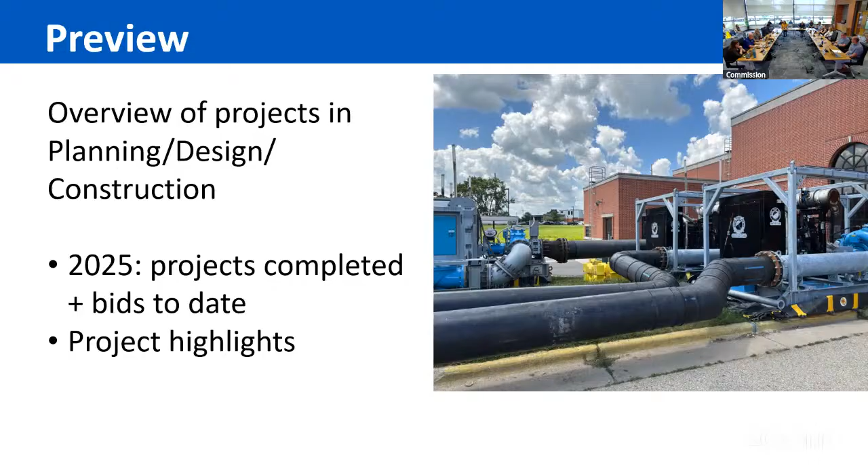Okay, so starting with projects in planning, we have the projects listed here with the stoplight colors. As we've discussed before, at the treatment plant, we have 2 large facility plans underway: heat and power, which is on track to be completed this fall, and then the biosolids facility plan. I'm showing that one as yellow. We're a little behind schedule on that as we just kicked it off in late spring.

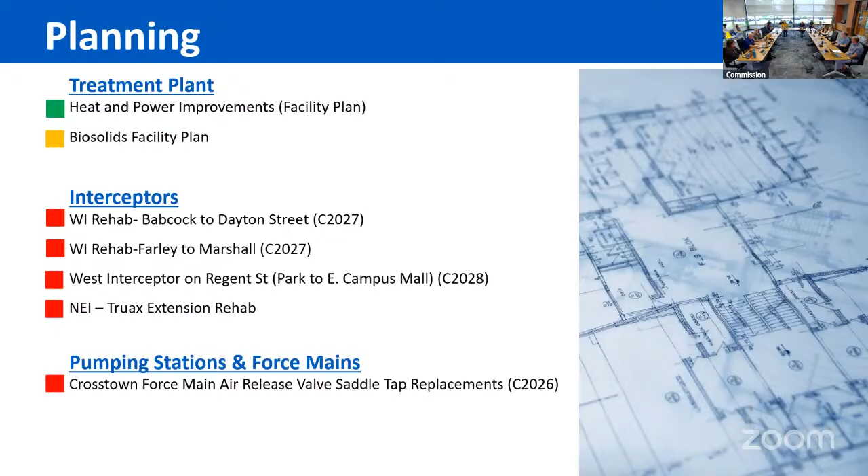And then onto the interceptor projects, 3 of those are lining projects that we hope to begin later this year. One of the interceptor projects, the West Interceptor on Regent, is essentially just waiting to be coordinated at some point with the City of Madison project whenever it occurs. And then lastly on the sheet, for pumping stations and force mains, we have the crosstown force main air release saddle tap replacement, which we anticipate starting in the fourth quarter of this year.

All right, next up is design. The stoplight colors are indicative of how it's going. At the treatment plant, we've got liquid processing phase 2, which is on track. We are currently reviewing 30% drawings for that.

I talked about the Lagoon Dike Improvement Project at my last update. We're on track to bid that early next year. For dryer and seeding, we're a little behind schedule, but you should see an item selecting a consultant for that at the first meeting in August, so watch for that. For W4, we are at 95%, so we should be bidding that probably this fall, September-ish.

For the interceptors, we're in design for 4 projects. I'm showing the 9 Springs Valley improvements as yellow. We're a little behind where we thought we would be with that project, but we do have the route selected, and we do have our field work complete, and we're working on starting the real estate acquisition process for that. Remember, that's the project that will replace the pipe where we had to do the emergency repair last year, AKA some of you called it Theron's sinkhole.

I did also want to update you on the final numbers for that emergency repair, as we've now received contractor invoicing for that. The grand total there came to $1,550,000.

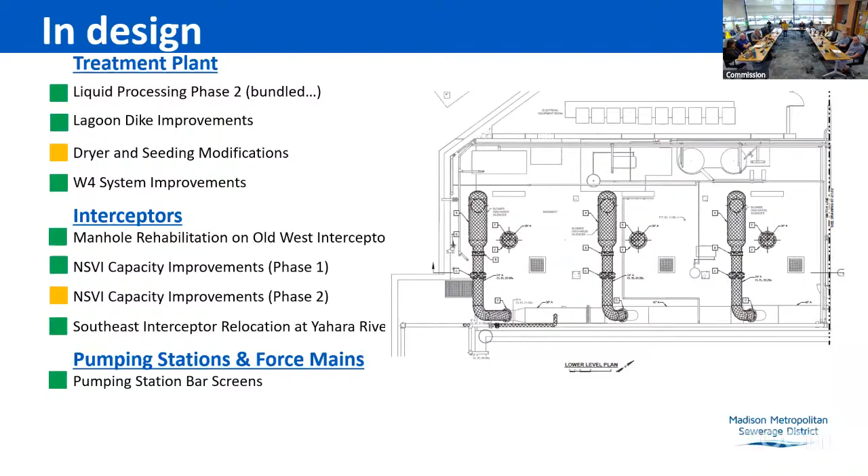Okay, into construction projects. Here's a map with our current major construction projects. I've got 10 on the map shown here. So 3 projects are in blue down at the plant. Then there are 5 interceptor projects in purple: 1 up in Waunakee and Westport, 2 along University Avenue, 1 along Highway 51 south of the Beltline, and then 1 in the city and town of Verona.

And then finally, we've got 2 pump station and force main projects. They're shown in teal. So pump station 17 down to the very far southwest, and then 1 newly into construction phase shown at pump station 10, which is up to the northeast off Milwaukee Street.

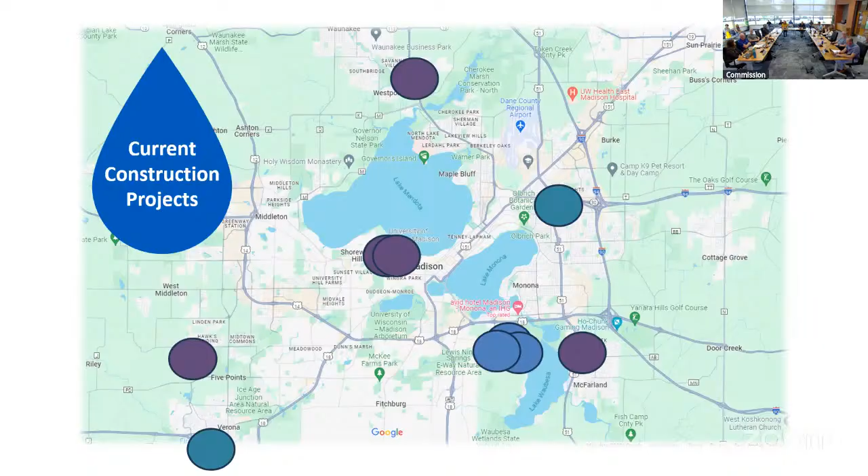So here's those same projects with the stoplight colors. Remember, italics means that I've newly moved it into the next phase, so that means it just moved from design into construction. You can see a new one there at the bottom.

At the treatment plant, starting at the top, we've got 3 projects underway. The sludge thickener drive replacement, it's kind of a tongue twister, is yellow. That's been bid, but we're waiting on equipment arrival in November. The electrical service equipment replacement is yellow, as we've had some contractor permitting delays, but they're finally rolling again. They were in fact pouring concrete this morning on that one to start bringing the building up. The flow splitter here at the plant is on track.

On to interceptors. There's a lot there, so I won't go into detail, but I want to mention a couple things. For the Lower Badger Mill Creek Phase 6, we had anticipated completing the portion of that project along Shady Oak Lane before Labor Day in order to not interfere with the Ironman bike route. However, the contractor wasn't able to get the manholes in time, so instead they've elected to wait to begin that pipe install until after the race so that we won't screw up Ironman. So we won't really get started on the pipe install for that until after Labor Day. That's kind of the bad news.

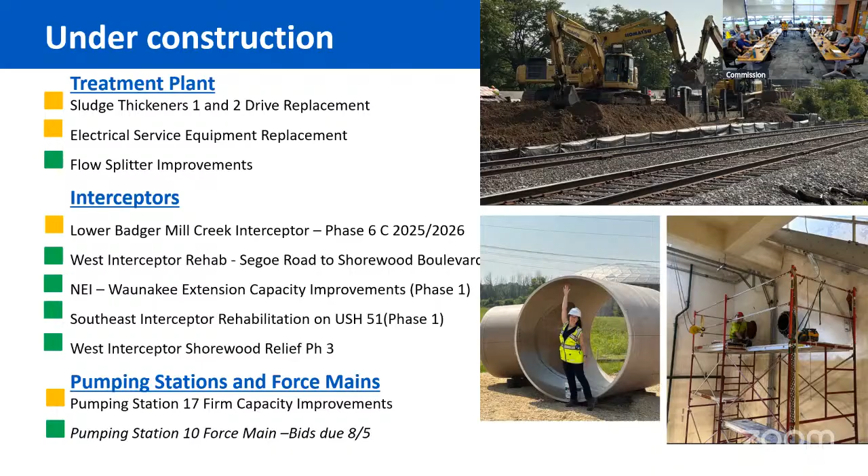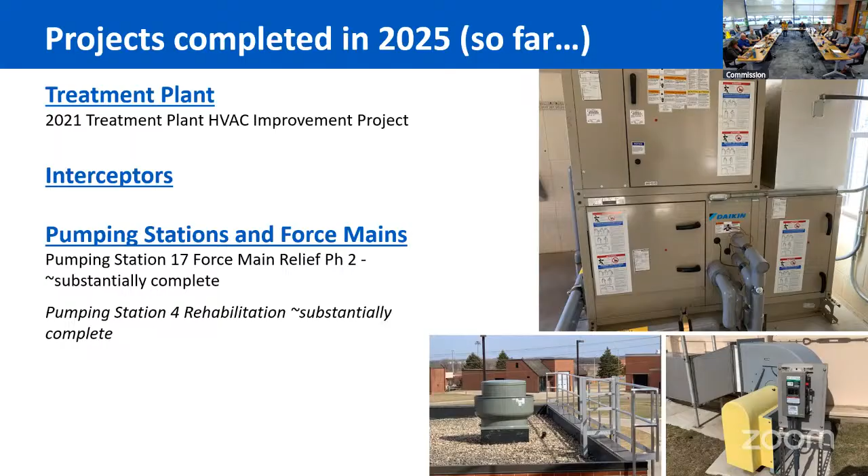Switching gears now to major projects completed to date in 2025. Remember, italics means it's newly added to the slide since my last update. So far this year, we've got 3 completed projects. We talked about the 2021 HVAC project in my last update, and the other 2 projects listed here under pumping stations and force mains are now substantially complete. I've got more information on those in a second in project highlights, so I'll talk more about that in a minute.

All right, lastly, on to a couple project highlights. I wanted to highlight 2 of the projects that are now substantially complete. You should see the acceptance of work items coming through commission for those in the next couple of months.

That's what brings flow into the pumping station. The second thing is the upgrades at Pumping Station 17 itself to handle those higher flows. And then the third is the Pumping Station 17 relief force main - essentially constructing a second parallel force main to carry flow away from the station.

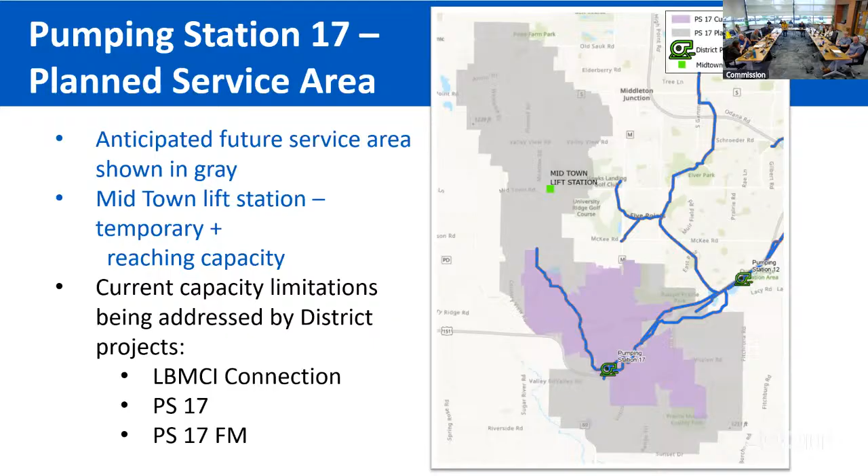So you might also recall that the Pumping Station 17 relief force main has been built in 2 phases. Phase 1 was completed in 2022, and now the second phase is substantially complete. The scope of the second phase was to pick up at the west end where phase 1 left off, west of Highway 151, and then continue up towards the northeast to Goose Lake, where the pipe ties into the Nine Springs Valley interceptor.

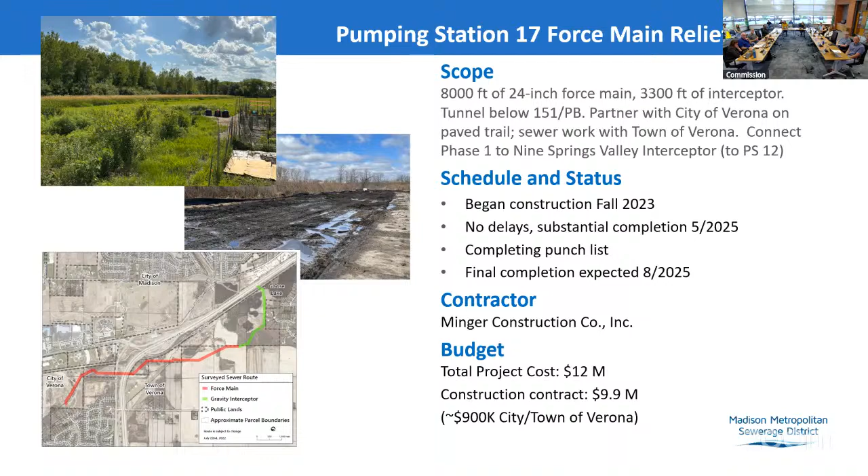That project was constructed by JF Ahern, and the completion of the project was delayed about a year, mostly due to supply chain issues. That seems to be sort of the new normal for our projects that are kind of heavy equipment, mechanical and electrical equipment heavy sort of projects, unfortunately.

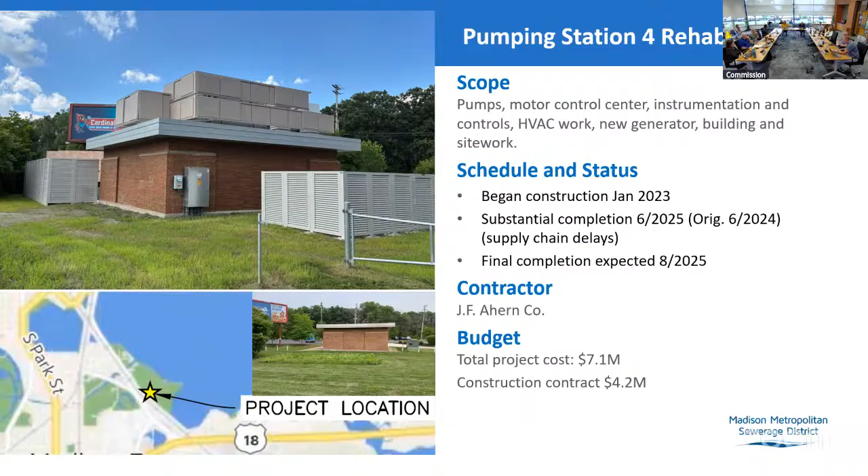So I believe with that, that's all I have for today. Happy to take questions. Thank you, Lisa. Anybody have any questions?

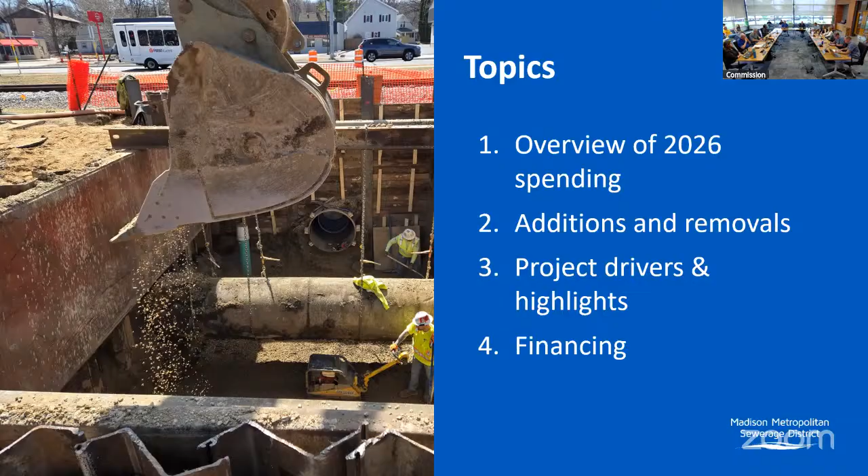So we have added some new projects to the plan. The most notable ones are listed here. The biggest one is a remodel of our laboratory, and in the item after this one, Mary Powers will be talking about lab operations and will go into more detail on the needs and what's included in that project. There are also 2 interceptor rehabilitation projects that are new to the plan, and then a smaller maintenance project for some equipment replacement at our pump station 2. In total, in aggregate, they are about $9.2 million.

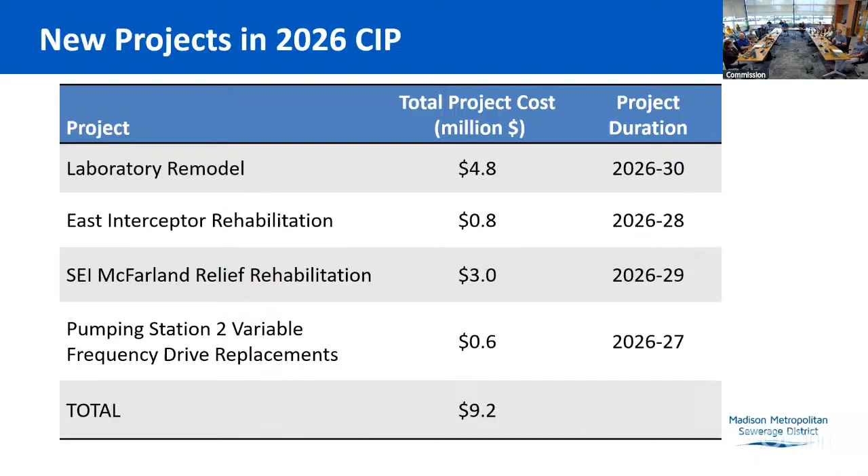So to offset those costs and also staff resources, we look for some removals as well. They're listed here. The first, the monitoring stations — you may recall that last month Jen Hurlbus provided an update on the I/I program and talked about this regional monitoring network that we had. This item was supposed to provide permanent monitoring stations. We're still going to do that work, we just think we can do it with temporary meters that are less costly and also more flexible. So that item will no longer be a capital item.

The next item, access to interceptors. Right now we can't access 20% of our system just due to wetlands — our facilities are in wetlands and other environmentally sensitive areas. So the intent of this item was to provide permanent access. Instead, we think we can provide access on a project-by-project basis through other means.

Then the last item there, power generators. This is an effort to provide standby portable generation at all 18 of our pump stations. Right now we only have it at 5, and we'd do that over a 10 to 15-year period. This is a really great project, we'd love to do it, but right now we have greater priorities, so we're putting this one on hold. I should point out, though, that we still meet all applicable code requirements for backup power.

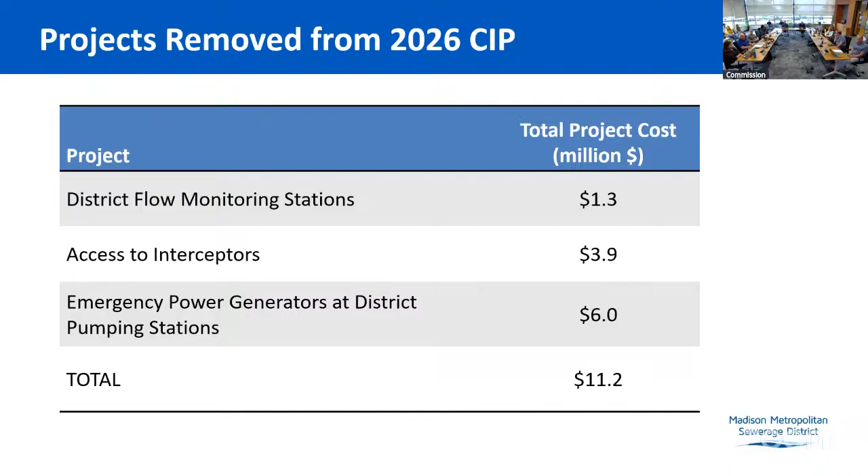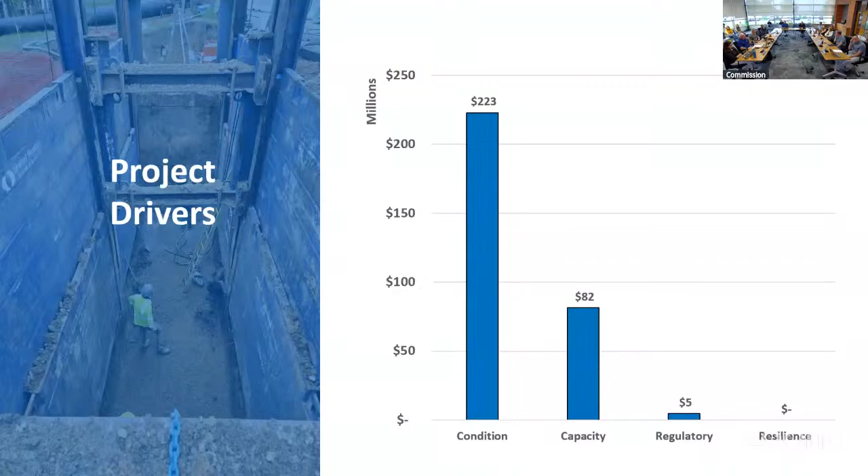So getting into some of the specific projects, I'll start with the interceptor category. In the past 20 years we've really focused on other interceptor systems, like the West Interceptor System and Lower Badger Mill. They've had multiple phases over the last 20 years, but those projects are coming to a close now, and the focus will shift to the Nine Springs Valley Interceptor.

You've heard a little bit about this project already. Phase 1 and Phase 2 are underway. It's a long project, about 30,000 feet from Pump Station 11 to Pump Station 12, so we are well underway on those two phases. Phases 3 and 4, capacity is supposed to be reached sometime between 2030 and 2040 in those stretches. We'll attempt to do some more flow monitoring and zero in on the time periods when those are needed, but it likely won't be for another 5 to 10 years before we start on those.

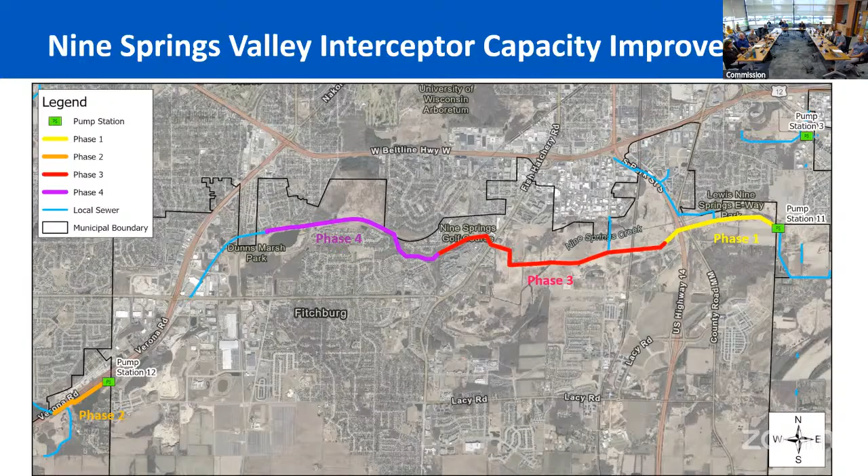Moving on to the condition of the interceptor system, I always like to show this slide as a reminder of the age of our system, showing pipe installed by decade. You can see that about 70% of our system was installed prior to 1980. Given that some of these sewers have service lives of about 50 to 75 years, if you do the math, we really need to start rehabilitating these sewers.

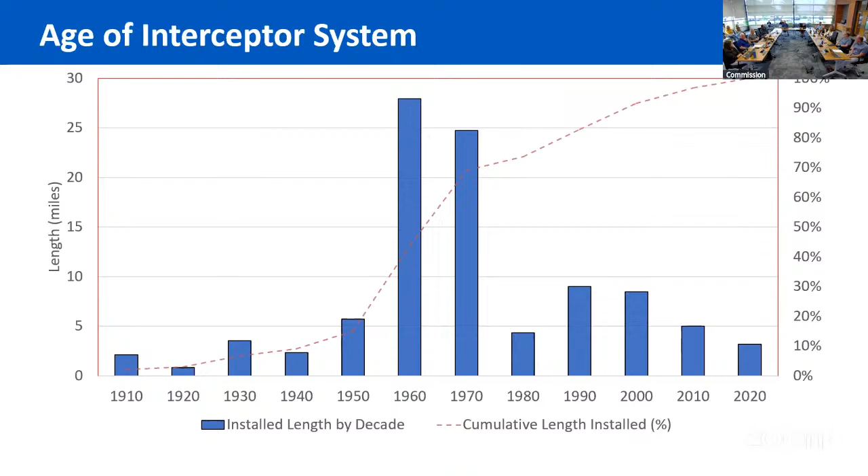So we had 7 projects in the 2025 CIP. Those 7 projects remain, and now we're adding 2 more to try to address this need.

So the way we determine which interceptors to do - Jen Hurlbus might have presented this about a year ago as part of our facility plan overview - basically, we do a risk assessment for our interceptor system. On the y-axis is the likelihood of failure based on TV inspections, and the x-axis is consequence of failure. Using those two together, we're able to define risk for each of these interceptor sections. The last time we updated this table, we found there were 2 interceptor sections we'd like to rehabilitate before they get into the red zone.

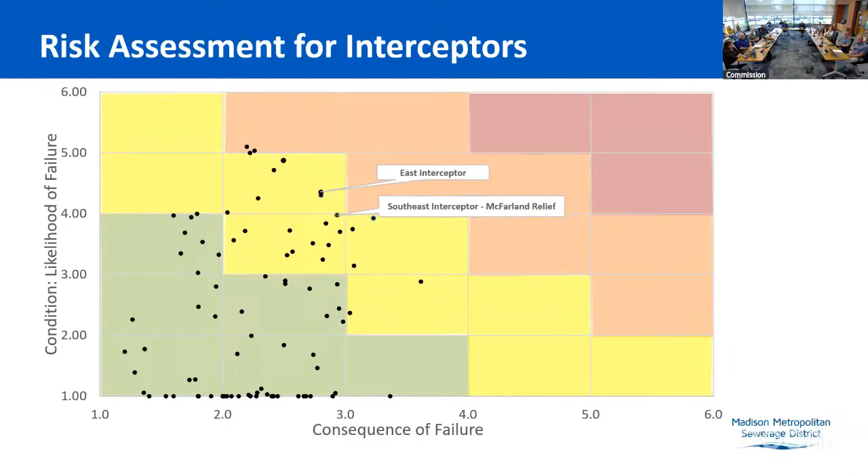The first is the East Interceptor rehabilitation. It's located in the city of Monona on Bridge Road near our pumping station number 7. Most of the system through the city of Monona was rehabilitated or replaced in the mid-1980s and early 1990s due to a sewer collapse, but they left about 1,000 feet upstream of pump station 7, so that's the section we'd like to focus on now. In the picture, at what I call the 1 o'clock position, steel is starting to show through the pipe wall, which is a major concern because that's a structural deficiency. Especially given the location, it passes underneath the Yahara River, so a sewer collapse underneath the river would be - I don't want to talk about that one. High consequence of failure, and given that need, we'd really like to start this one this year. You'll see in an upcoming meeting a request to add this to the 2025 capital budget as well.

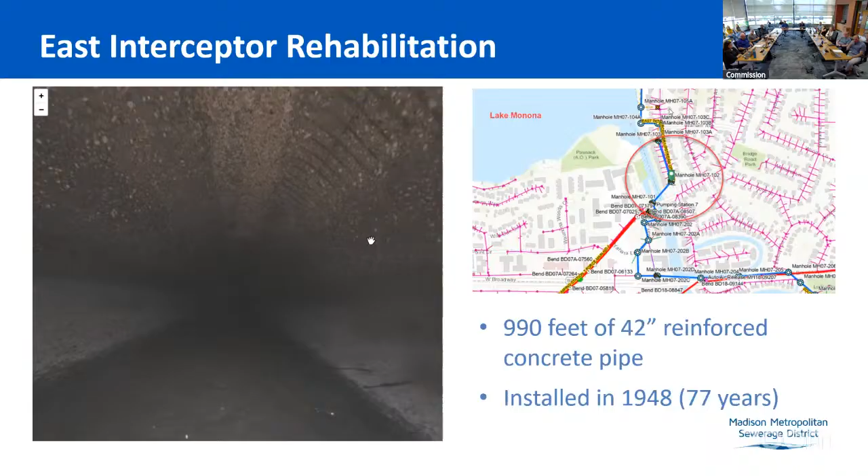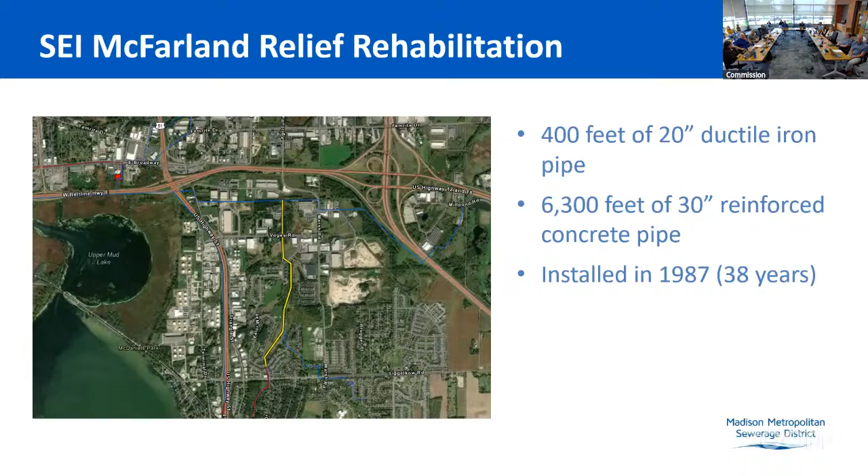The other project is located about 2 miles to the east. This is in McFarland on our southeast interceptor, basically between Siggelkow Road and the Beltline. This is a longer stretch, and the pipe is not as old - it was installed in 1987 - but given the location of the sewer, that's the critical thing here. It's located immediately downstream of a force main. Force mains have a lot of hydrogen sulfide in them, and when they discharge to a gravity sewer, they release that hydrogen sulfide. It gets converted to sulfuric acid, and that eats the pipe. That's what's going on here, so that is also part of this plan.

That's our force main. That's pump station 9.

So moving on to the pump station category, as I mentioned, a lot of our rehabilitations have been completed over the 20 years, so we're in pretty good shape. But one major one that hasn't been done yet is pump station 16 in the city of Middleton. It'll be starting in 2027.

We also have a project to install bar screens at 4 of the stations that pump to the plant. That work is well underway. And then also, Lisa mentioned this one, a project to repair a leak on our pumping station 10 force main. Then a related project to that is to inspect that force main once that leak is repaired.

That's a type of project that we haven't done before. Inspecting force mains is difficult and costly, so this is kind of our first attempt at a major inspection program. The fact that we have done these rehabilitations allows us to get to more maintenance work, so you'll start to see maybe smaller projects to replace valves and other types of equipment throughout the system.

So finishing with the treatment plant category, again, this is the largest category, and we've heard a lot about these 3 projects over the last couple of years. The highest priority one, and the one that's further along, of course, is liquid processing. You know a lot about that one.

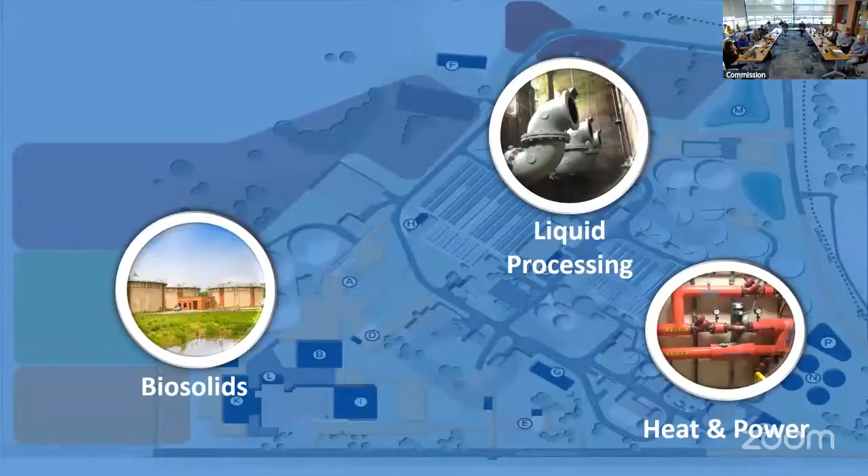And then the third priority is the heat and power plan, which the facility plan will be complete by the end of the year. It has a lot of interdependencies with the biosolids, so it's possible that we could merge those 2 projects. We just don't know yet what that would look like.

Then I'll conclude by talking a little bit about the report we just mentioned that's in your packet. Last year, when I was presenting the 2025 CIP, I mentioned 6 projects that would be crucial for us in spending in 2025, and this is just an update of how we are faring on those 6 major projects.

We had budgeted about $23.2 million this year, and spending so far through the first week in July is about $12.1 million. So these 6 are, I would say, right on track, and you can look at the other ones in the packet. So with that, I'll pause and take any questions anyone has.

Okay, anybody have any questions? Patrick?

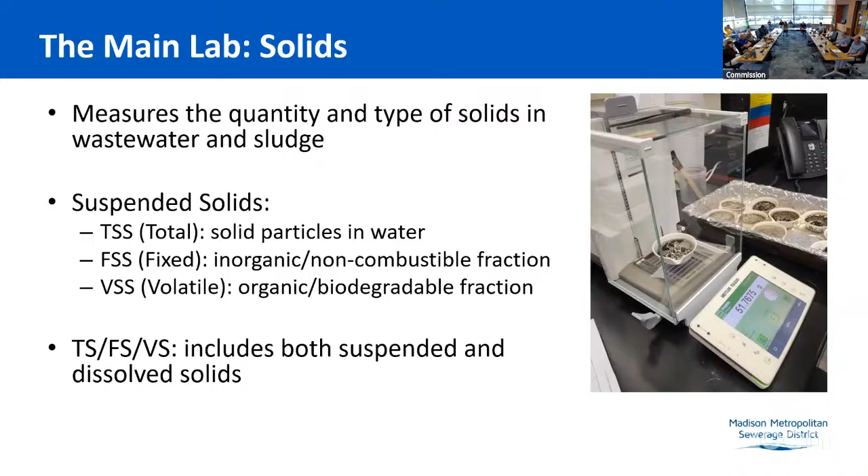One of the cornerstone tests in any wastewater lab is biochemical oxygen demand, or BOD. This test measures how much oxygen microorganisms use to break down organic matter in a sample over 5 days. We also run a more specific version called carbonaceous biochemical oxygen demand, which focuses on only carbon-based compounds and excludes the oxygen demand from nitrogenous material. These tests help us understand the strength of the wastewater and whether treatment is effectively removing organic pollution. BOD values are also directly tied to service charge calculations for our owner communities.

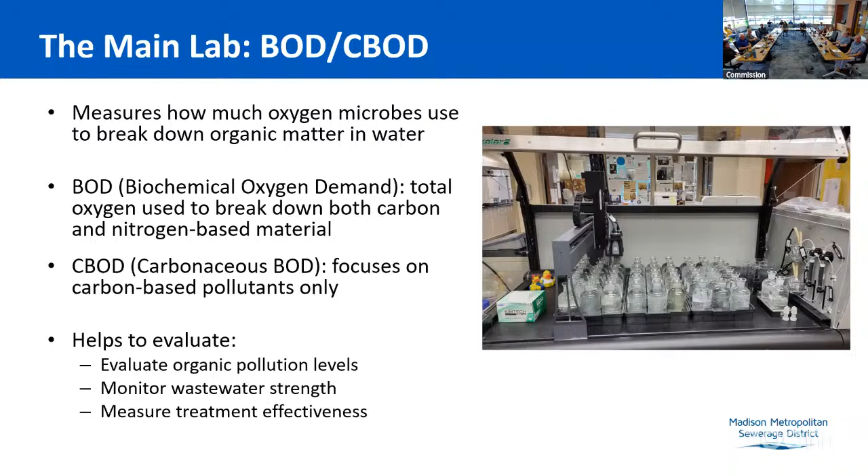We also use chromatography, a powerful separation technique to analyze components that affect water quality. We operate an ion chromatograph to measure ions like chloride, nitrate, and sulfate, which are important for both regulatory and operational decisions, and a gas chromatograph to track volatile fatty acids, which are crucial for monitoring our anaerobic digesters. These tools give us high-resolution data and help guide process control and research.

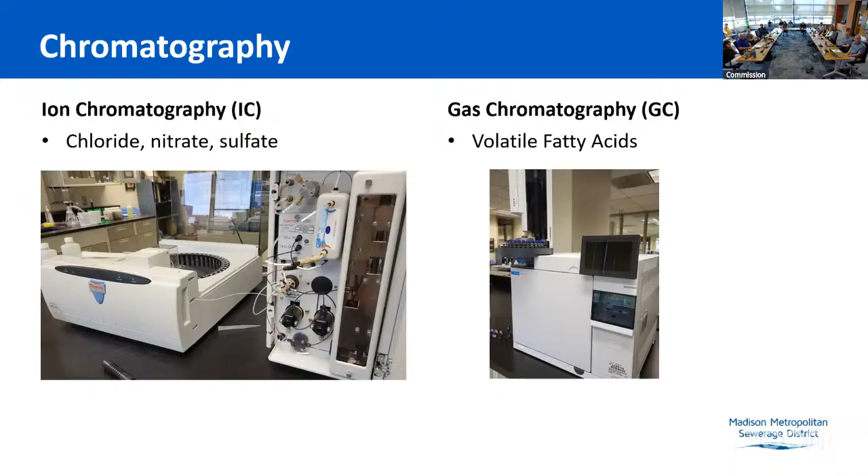To monitor for metals, we use ICP-OES, a technology that uses plasma to excite atoms in a sample, allowing us to detect metals like copper, zinc, and lead, and also essential nutrients like potassium and sodium. When it comes to mercury, we use a specialized mercury analyzer. Mercury testing helps us meet permit limits and supports outreach efforts to reduce mercury in the sewer system.

Microbiological testing ensures our treated water is safe to return to the environment. Currently, we test for fecal coliforms using a membrane filtration method. In our upcoming permit cycle, we expect a requirement to shift to E. coli, which is a more specific indicator of recent contamination.

We also run multiple tube fermentation for biosolids, which provides an estimate of bacterial density in those samples.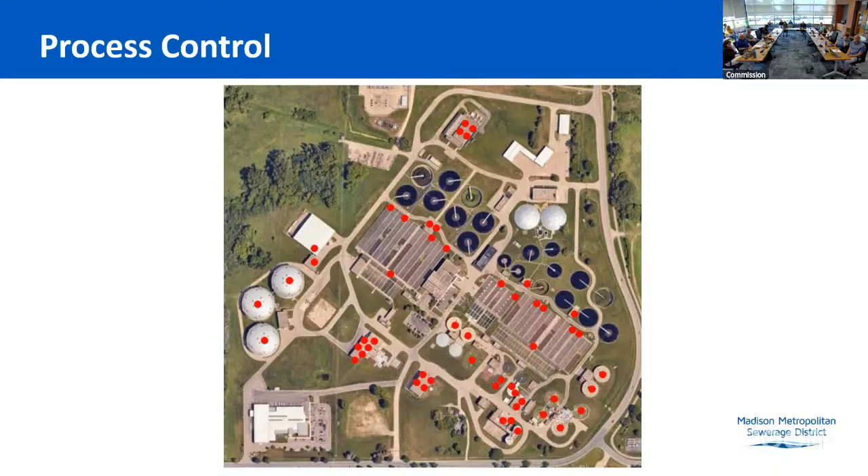Outside the plant, we test samples collected from our service area to calculate fair and accurate service charges for our owner communities, ensuring everyone pays their share based on actual loadings. The district's collection system services crew collects samples quarterly from 6 district pumping stations, 9 non-district pumping stations, and 54 other locations within the service area to make these calculations. Most of these sites are sampled for a week out of every quarter, while some can be sampled 2 or 3 weeks.

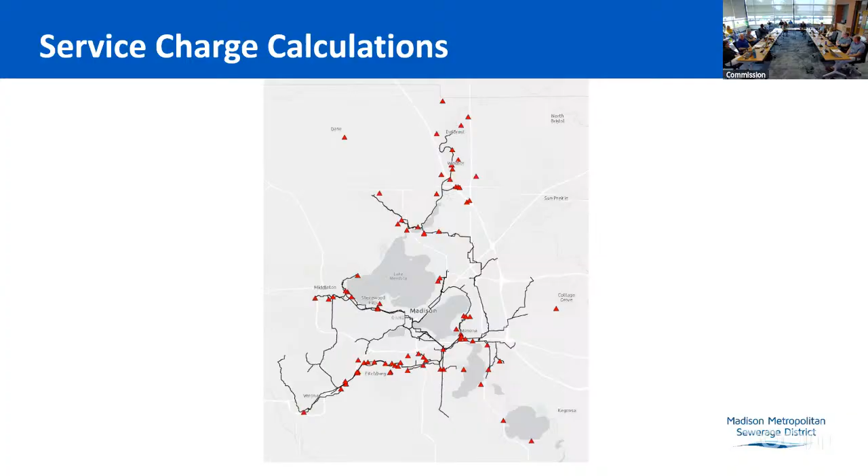Looking ahead, the lab is working to plan for the future. We have recently begun the first phase of a 3-phase initiative to modernize the lab. For this phase, we have chosen to work with Strang, an architectural firm located in Madison. They have pretty impressive lab design experience.

No funding decisions are needed today, but we wanted to share that we are taking the initial steps to assess the current state of the lab. During this project, we will be evaluating safety, efficiency, and design improvements that can carry the lab into the future. The deliverables from this phase will be an assessment report containing a preliminary design and estimated cost for future phases, which will include final design and construction.

In closing, the lab is a small but vital part of the district's operations. Our team is committed to excellence, and we're proud of the role we play in protecting public health and the environment. Thank you for your continued support and interest in our work. This time, I'd be happy to answer any questions.

Anybody have any questions? Beth? I just have a comment. Back in the dark ages, when I started my career, after getting my bachelor's degree here at the district, I worked as a chemist in the lab, and I'm impressed that you have 6 chemists working in the lab now, doing all those samples. Back when I was working, we had 5 or 6 chemists doing probably maybe half of the analysis that you're doing today. So it just speaks to the efficiency, and I'm glad to see that, so thank you.

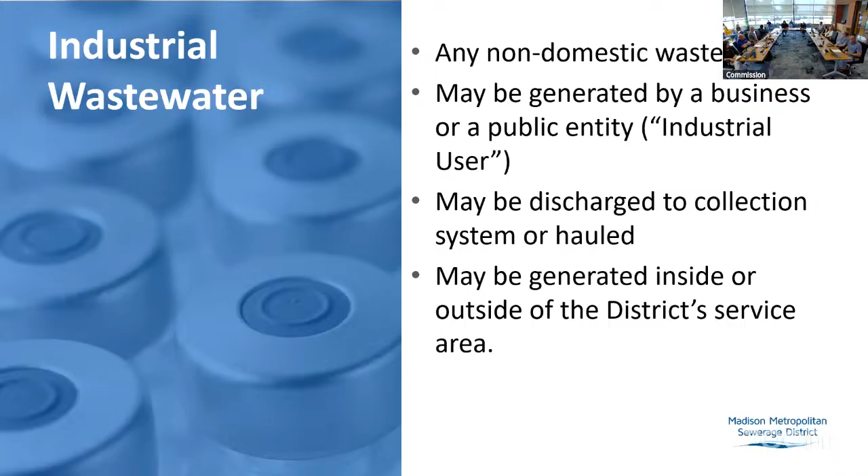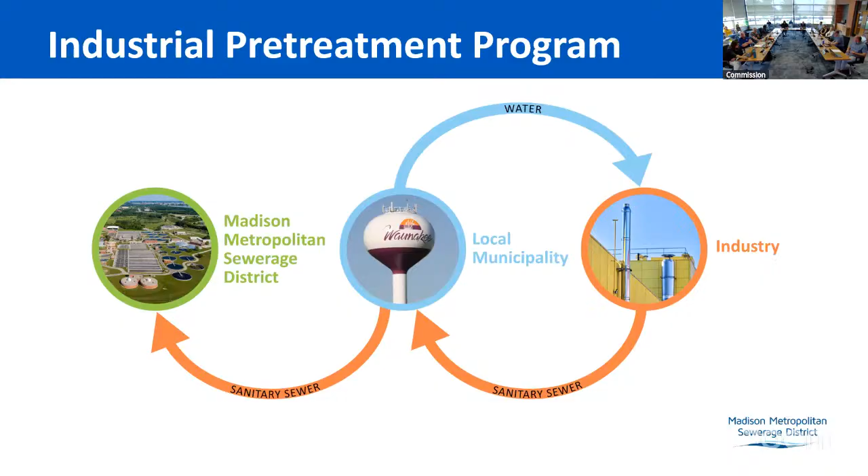Now let's take a look at some regulatory relationships. The district is in the business of treating wastewater and returning the clean water, or effluent, to the environment. Wastewater treatment is regulated to make sure that the water we send to the environment is clean and safe. The wastewater regulations that apply to us originate at the federal level with the EPA. The Clean Water Act establishes the basic structure for regulating discharges of wastewater pollutants into the waters of the United States and regulating quality standards for surface waters.

The Clean Water Act makes it unlawful to discharge any pollutant from a point source, like a pipe, into a navigable water unless a permit is obtained. EPA established a permit program to control those discharges in the U.S., and that program is named the National Pollutant Discharge Elimination System, which you may know by the acronym NPDES.

Many states have their own environmental regulatory agencies. Here in Wisconsin, we have the DNR. State agencies can request to be able to administer some of the federal regulations within their state. The DNR has been authorized by EPA to administer the Clean Water Act regulations in Wisconsin. What that means is that the DNR regulates any discharger of pollutants to the environment under its own permits program, the Wisconsin Pollutant Discharge Elimination System, or WPDES.

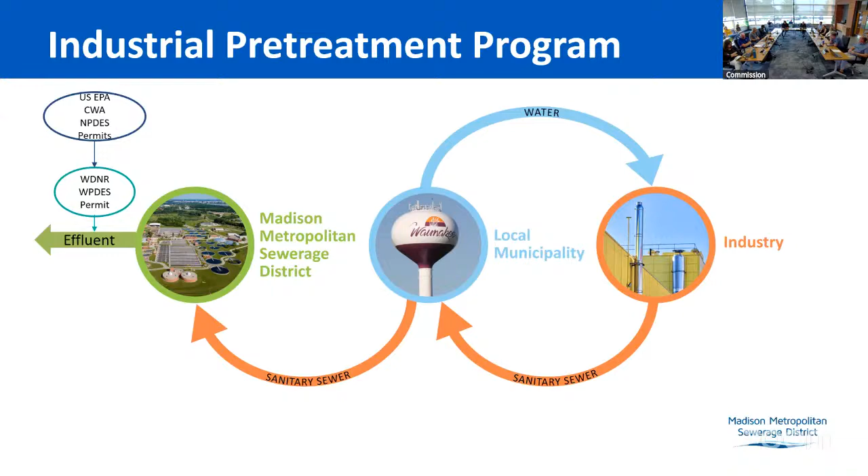And one thing we have in place to make sure we're able to keep meeting our permit limits is a sewer use ordinance that outlines what can and can't be discharged to the sanitary sewer. The district's sewer use ordinance applies to the entire collection system. Additionally, it's worth noting that our customer communities have their own ordinances for sanitary sewer users in their systems. Ordinances are meant to prevent harmful wastewater from being discharged and to protect infrastructure as well as human safety.

And I mention this because industrial users likely have multiple sets of local ordinances to follow for their wastewater. It also means that the district's discussions about industrial wastewater often include our customer communities, because they're also invested in what's happening at these facilities. Now, finally, in conjunction with our ordinances, the district has an industrial pretreatment permitting program for some industrial users, and that's really our focus for today. To tie this all together, the EPA has developed and implemented regulations that apply specifically to industrial wastewater.

So let's take a look at this industrial user on the right. If this facility were located along a river, they may wish to discharge their wastewater directly to that river, as that arrow, the effluent arrow, shows. In that case, the wastewater would need to be regulated under a permit.

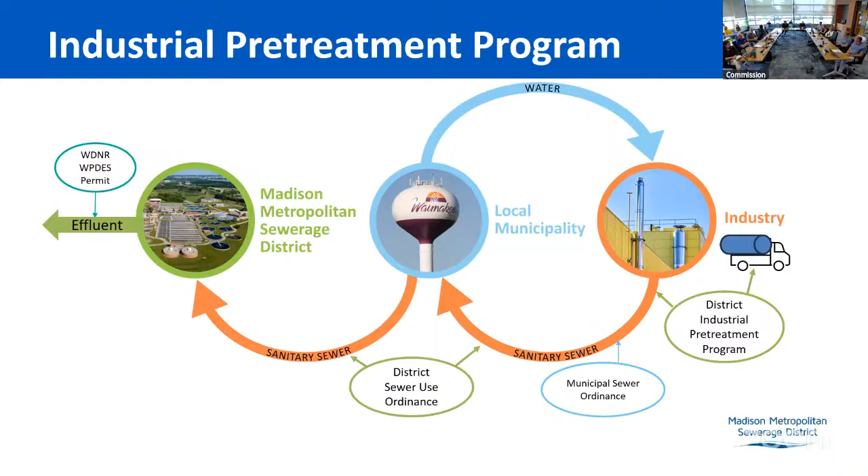Any wastewater plant, which is also often referred to as a publicly owned treatment works or POTW, that administers its own pretreatment program is required to develop and maintain what's called a pretreatment program manual, which outlines how the POTW will administer its program to meet all of the requirements in EPA's general pretreatment regulations.

This document must be approved by our regulatory agency. In our case, it's the DNR, so that we can obtain authority to administer this program. The manual details all aspects of our program, such as how it will be staffed, funded, and enforced. Our pretreatment program manual was submitted to DNR way back in 1984, and this is, as far as we can tell, still the most recent version of this manual. Because it exists, it's valid, and we've met that requirement.

But it really does need to be updated. So that's something that we have on our list of projects that we'll be able to tackle in the not too distant future.

We're also required to develop and follow a formal enforcement response plan that details what steps the district will take in response to violations that occur under our pretreatment program. The federal regulations are prescriptive in many ways, but they were also written to allow some flexibility for POTWs to administer their programs in ways that make sense for them.

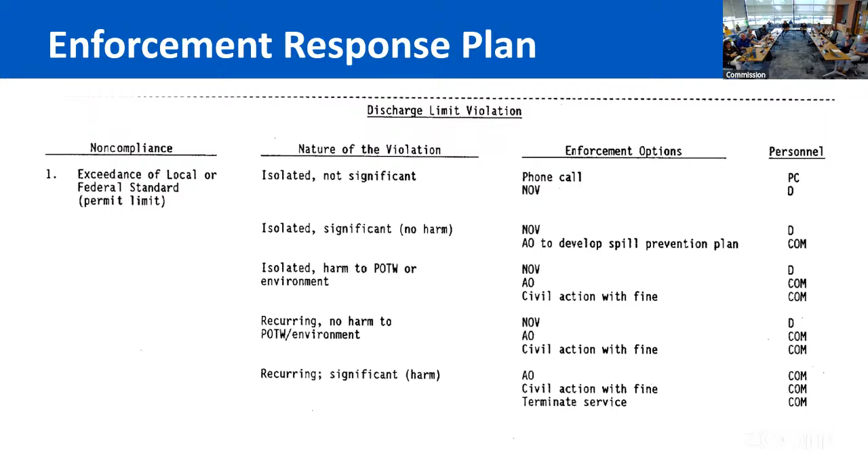In order for us to regulate our industries effectively, we have to know who they are. As we'll talk about in the next slide, we have a formal permit program for certain industrial users. We are required to identify and locate all industrial users that could possibly be subject to our permitting program. We have to be able to demonstrate to DNR that we have permitted all industries that we are required to.

As part of that, we're expected to be able to explain why any industrial user of our system is or is not permitted. This is fundamental not only for making our regulators happy, but the district benefits from knowing what types of wastewater we're receiving and where it's coming from.

It also is good for us to maintain relationships with our industries so we can better plan for their business expansion and any pollutant loadings or volume changes that we receive. It also helps us identify program priorities in a strategic way.

This is another area that has substantial opportunity for improvement at the district. We are in a region that's very appealing to businesses, and there are a lot of different businesses around here. It's been a challenge to keep up with industries as they arrive and grow and change, but we're moving in the right direction on that front.

In my time here at the district, the industrial user inventory has been updated largely in a reactive way. I do hear from industrial facilities pretty regularly. They reach out proactively to ask about permitting requirements, and they want to make sure they are in compliance. But admittedly, these are the facilities that have largely been my focus, and some have been identified as future permittees.

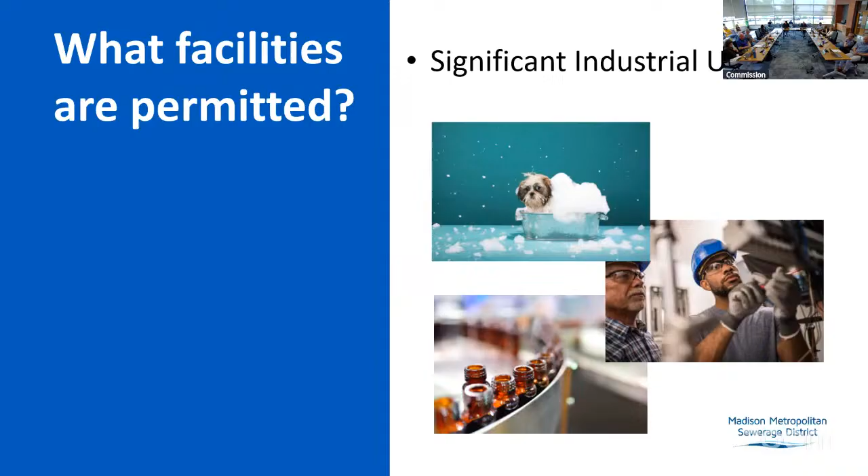As I mentioned, the district is required to issue a formal industrial wastewater permit to certain facilities. Any facility that has been permitted under our program has been identified by the district as a significant industrial user, which we shorten to SIU. There is a regulatory definition of SIU, and if a facility's wastewater meets at least one of these four criteria, we're required to evaluate that facility to determine whether a permit is needed.

A categorical industrial user is permitted because of the type or types of processes that are at that facility, and we'll talk a bit more about that in a moment. If a facility is discharging high volumes of processed wastewater, or if their wastewater is considered high strength, we'll evaluate that facility. We also have a catch-all for facilities that don't meet the other criteria, but that have reasonable potential for sending us wastewater that could potentially cause harm.

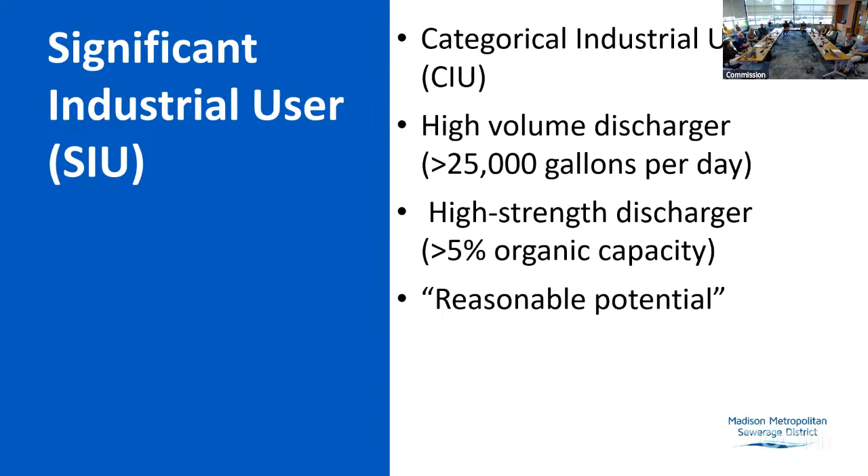Like I mentioned, we do issue permits to all facilities that meet the definition of categorical industrial user. These categories listed on the slide are defined by EPA. If a facility has even one process that meets EPA's definition of one of these categorical activities, that facility will be issued a permit, even if they don't discharge any categorical water to the sanitary sewer. We have to account for that wastewater, and we do that through a permit.

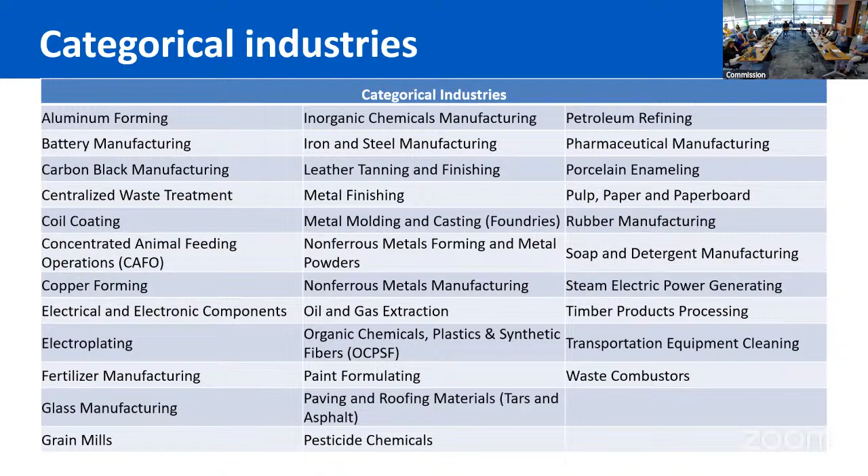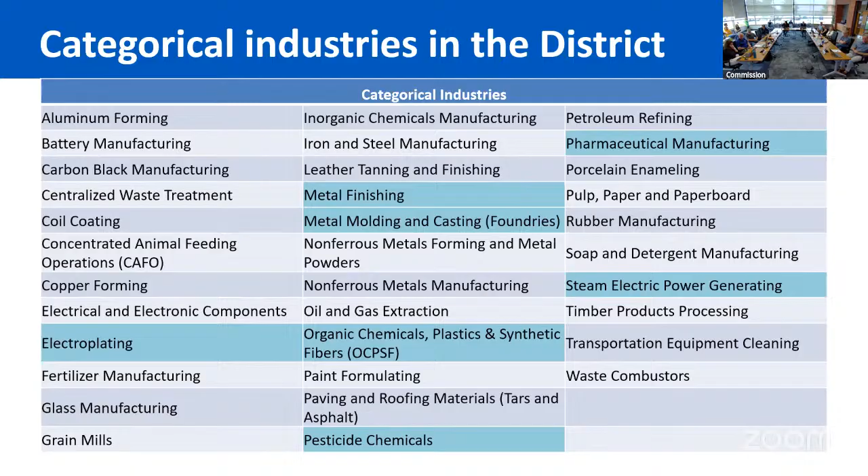On this slide, some boxes have been highlighted in blue. Those show that the district has issued categorical permits to all of those industry types that are highlighted here. We currently have 19 facilities that are permitted, and 8 more SIUs have been identified that we plan to permit.

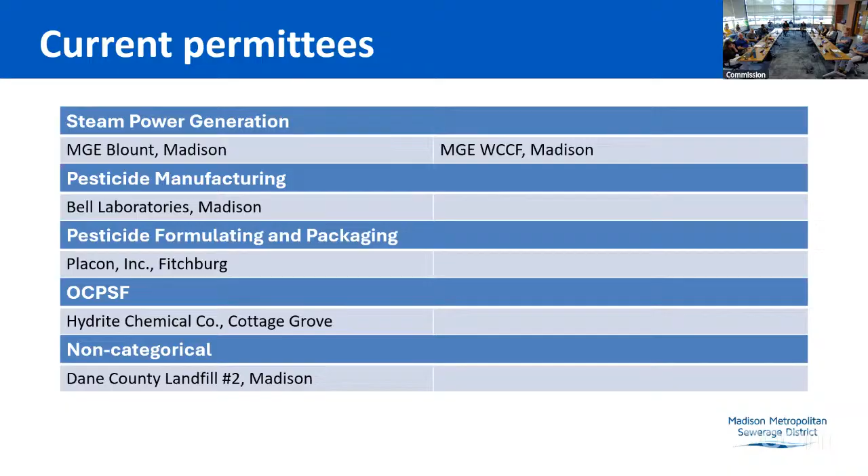We'll walk through very quickly the permit issuance process. Once a facility has been identified as an SIU, the application process begins. The facility will complete our standard application form. We ask for lots and lots of information about the business, about the operations, especially the wastewater, of course. We might need some preliminary analytical data.

I write the permits, but that's a collaborative process with the industry, and quite a few of my colleagues are often involved as well. We want to make sure our wastewater permits are protective of our system and meet the district's regulatory requirements, but we aim to be reasonable and work with our permittees through their concerns. Permits are issued for 5-year terms.

Each permit includes certain standard items, and we'll go through those quickly. Each permit contains two sets of pollutant limits that the facility's wastewater must be in compliance with at all times. We have local limits, which is a list of pollutants the district has established to ensure we are able to meet our permit effluent limits. There are also categorical limits, established by EPA for those industrial categories we looked at earlier.

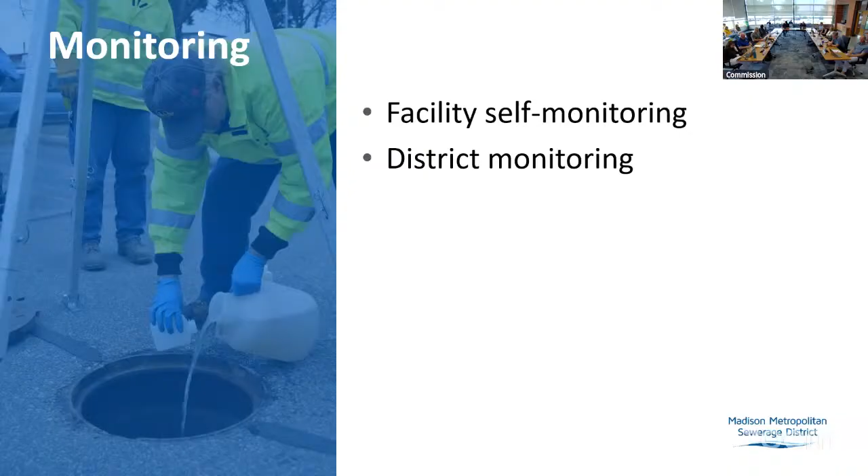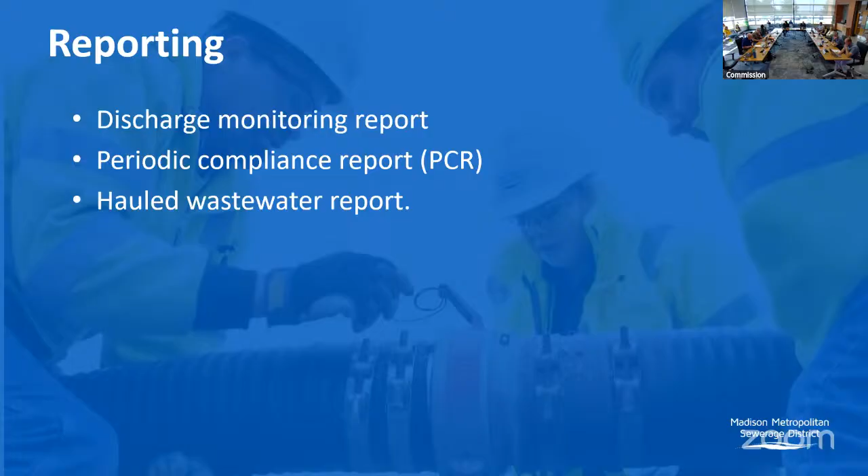In addition to sampling, everyone with a permit is required to submit compliance reports to the district two times per year. The requirement is to submit the results of the self-monitoring to show whether their wastewater is meeting permit limits, also to tell us about their wastewater flows, and if a facility ships out any of their processed wastewater with a contract waste firm, which some facilities do, they're also required to report what waste was shipped and where it was sent.

In the interest of time, we won't go through all of the other standard permit requirements, but we do have quite a few different things included in every permit.

I'm also required to visit each permitted facility at least one time per year for a site inspection. Those are scheduled in advance, and the purpose is to check in with the facility, sit down and talk about any compliance issues, any updates, anything that's changing at the facility, and also to conduct a site walkthrough to get eyes on those permitted processes, their sampling methods, as well as look at chemical storage areas and any potential for unintended discharges.

The last thing I want to cover calls back to something I mentioned earlier, which is permit violations and enforcement. One requirement we are subject to is that the district must take certain steps if a permittee does not meet a compliance requirement in their permit. Our regulators at the DNR require this of us. If a permittee experiences an exceedance of a pollutant limit or an accidental discharge of a chemical or other potentially harmful condition, we want to hear about it so we can try to mitigate any hazards, and we want to work with the facility to understand what happened and how it can be prevented in the future.

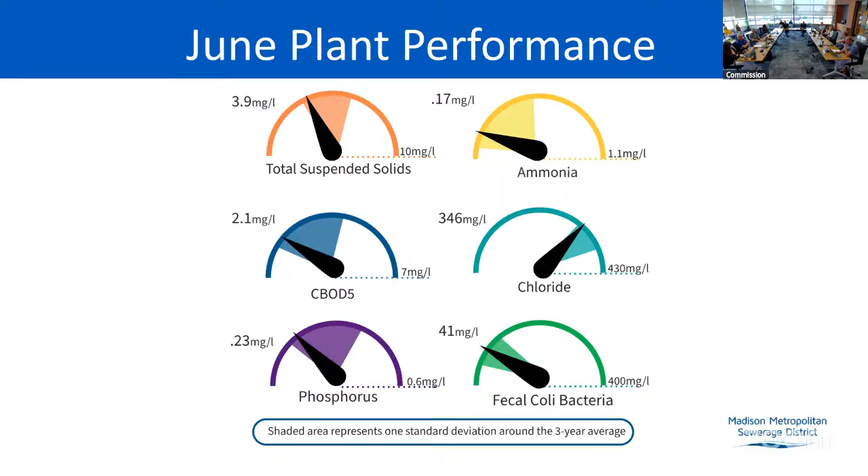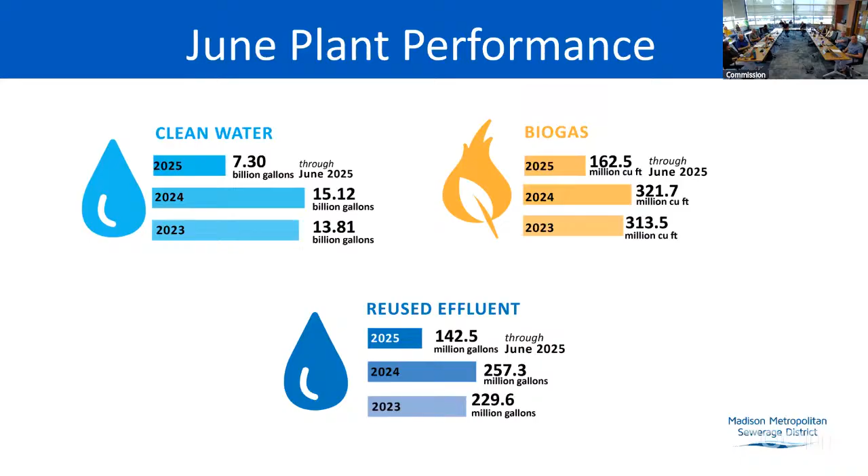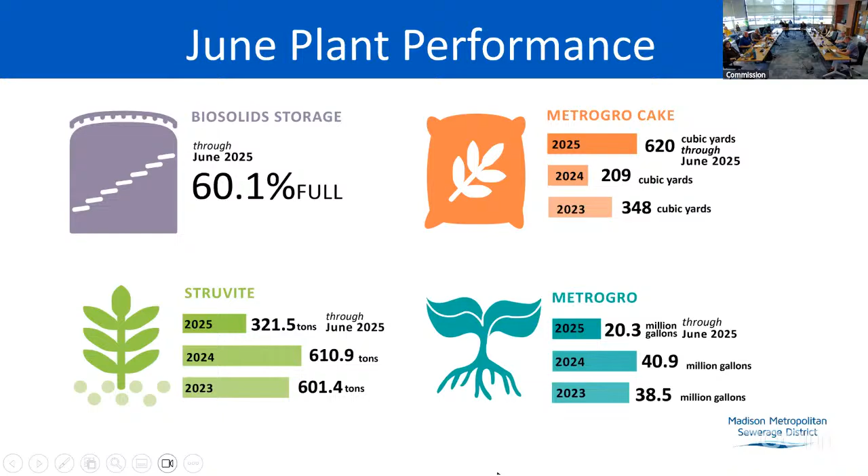Lots happening. Good morning, Commissioners. Vanessa Wishart, Legal Counsel for the district. I'll do a general overview of legal work we've done over the last month, but I want to highlight two items that I know the Commission wanted an update on.

The first are the condemnation proceedings. The litigation team at Stafford is taking the lead on that, but I got an update from them. For background, there are two property owners who challenged the district's easements, and for each of those two property owners, there are two proceedings. One is a condemnation proceeding, based on the property owners challenging the amount of the award the district provided for the easement. The other is a right to take action, which is similar but slightly different. In those cases, the property owners are arguing that the land left over after the district takes its easement is what's called an uneconomic remnant, so the district needed to provide additional compensation for that. So again, two property owners, two proceedings for each.

Where we're at with those proceedings: for the condemnation proceedings, for both property owners, those went in front of a compensation commission first. Both property owners have appealed the compensation commission's award to circuit court, so those are pending actions in circuit court. For the right to take action, one property owner filed an amended complaint recently that the district answered, and the parties are working through some discovery on that case. The other property owner has until mid-December, as a legal function, to amend their complaint if they want to. The district would then need to answer, and similarly we would be working through discovery.